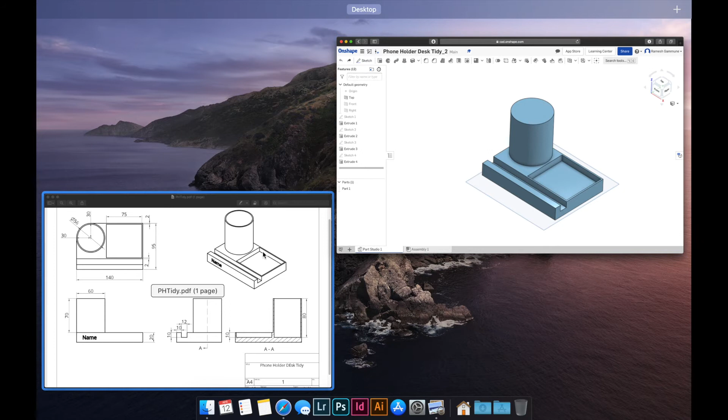I'm only going to do that one function today, but I am going to show you three different ways of doing it, and hopefully by doing it in three separate ways you'll understand how sketch relations work with the objects around it. Let's have a look at our drawing first. This is a 56mm diameter inner circle. The outside is a 60mm diameter circle, which gives us a wall thickness of 2mm.

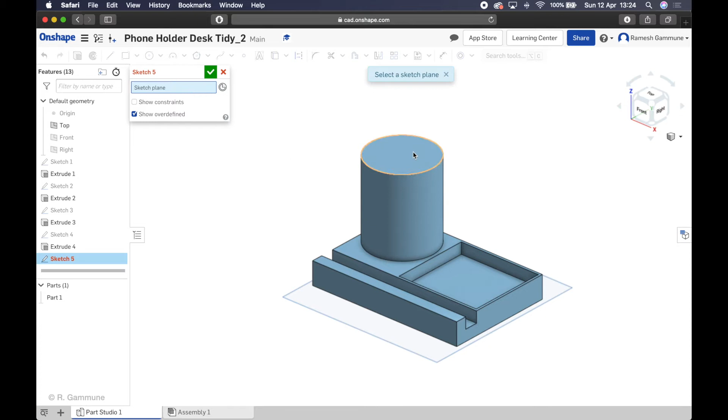Alright, let's go ahead and get on with it. First of all, we're going to sketch that inner circle and cut it down. As we are used to doing now, we're going to open a sketch and we will be sketching on this top surface. Double check it, make sure it's the correct one. Just to prove a point that we can only sketch on flat surfaces, it won't let me click the cylinder, because it's not a flat surface.

So sketch plane, that surface, right click, view normal to sketch plane. Let's go through the different ways of doing it. First one's going to be the easiest. We essentially want a second circle inside here, offset by 2mm, or with a diameter of 56mm. It's the same thing. I'm going to go ahead and pick the center point circle. And if we come towards the center of that, you'll see that little box, the lock-in box rather.

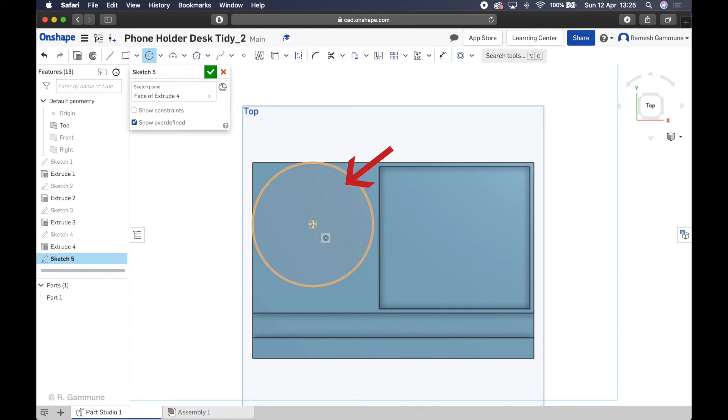There's another icon under that with two circles, which tells you that what we are going to draw will share the same center point of that circle. So we're going to go ahead and draw another circle, escape, dimension it, and give it our 56mm length. That's one way to do it.

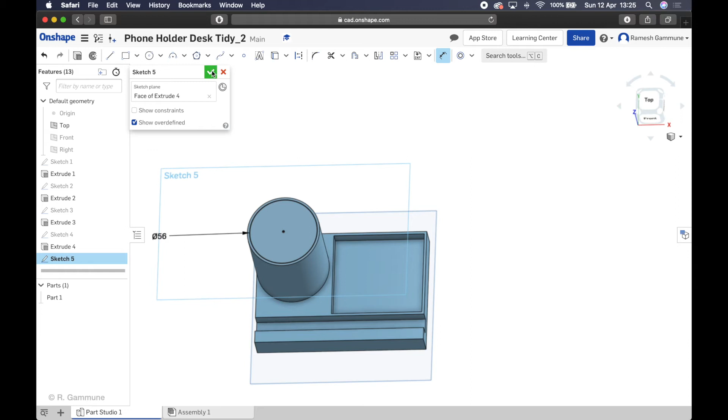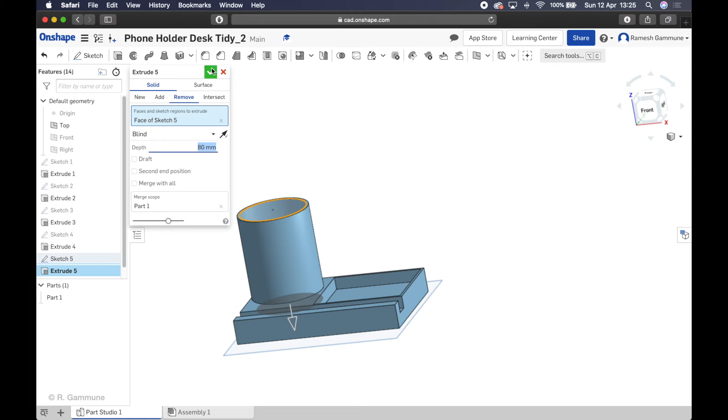We're going to go ahead and accept the sketch, and we're going to cut that down. Extrude, remove, pick that inner circle, look at the drawing again. It's going to go down to 80mm from the top, changing that to 80, and accept it. There we go, done.

Right, let's take it the second way now. This is also a good time to look at how the feature tree has been populated. You've got sketch 1, extrude 1, and if you just go over it, it'll highlight on your actual model what they are. So we are going to delete extrude 5 and sketch 5, just click them and hit delete on your keyboard.

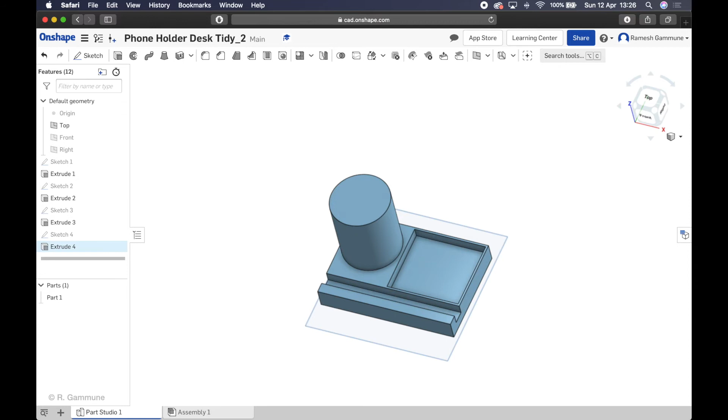So the second way to do it now, same deal, sketch, top surface, right click, view normal to sketch plane. I'm going to go ahead and draw a circle anywhere within that. Hit escape to get out of it. And what we are going to do is place this circle in the middle by defining a relationship between this circle and that circle.

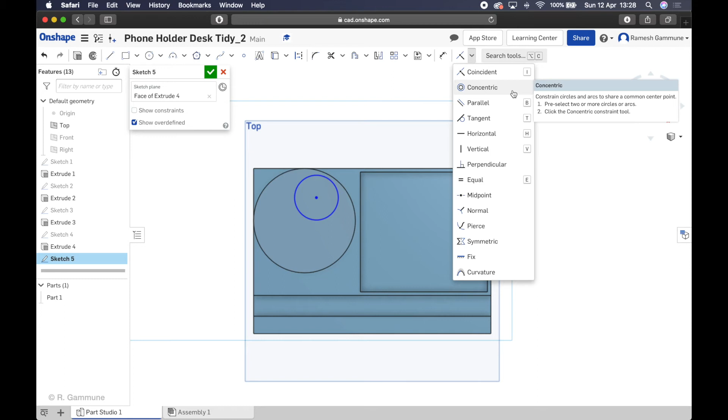So essentially what we're going to do is use your relationships icon here, you might have this fully visible, mine isn't because I've dropped my resolution for this. Just click on the down arrow, click on concentric. Concentric means the two circles share the same center. Click that and click this and the bigger circle, and you'll see that goes to the middle. Hit escape to get out of it. The center point is now black, which means it's not going to move.

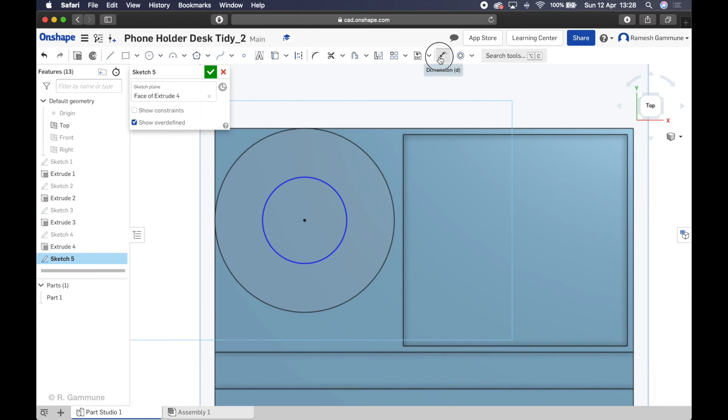But the actual circumference isn't yet, so we still need to define that by dimensioning it to 56mm. Enter. Then we can go ahead and do the extruded cut or the remove as per usual. 80 down. There we go. Accept that. It's done again.

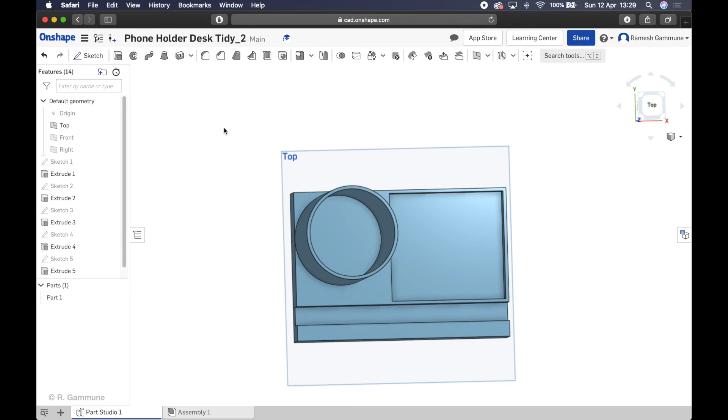Okay, let's go ahead and delete those two one more time to look at the last way of doing it. Same deal again, we have to start with the sketch, that doesn't change. Sketch plane, right click, view normal to sketch plane. Here we're going to use a function called offset.

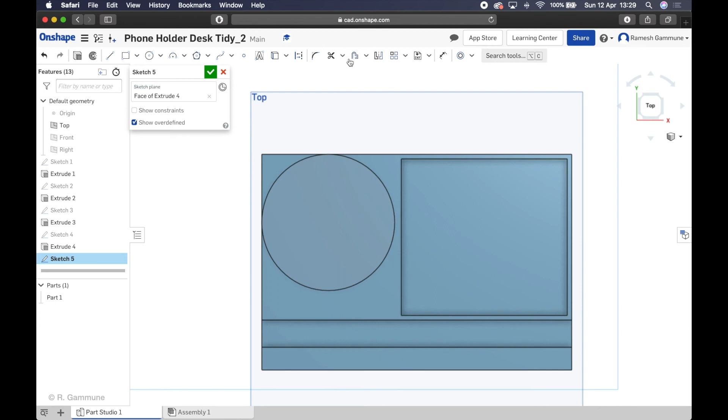Essentially what we're doing is we're taking this circle and we are going to draw another one on the inside that's 2 millimeters offset from it, which gives us a diameter of 56. So what we're going to do, see this little button over here, that's the offset tool. You click that, and if you click on the circumference of this, it'll draw this sketch out for you. But we don't want it on the outside, we want it on the inside. So grab this arrow and just pull it in wherever, hit enter.

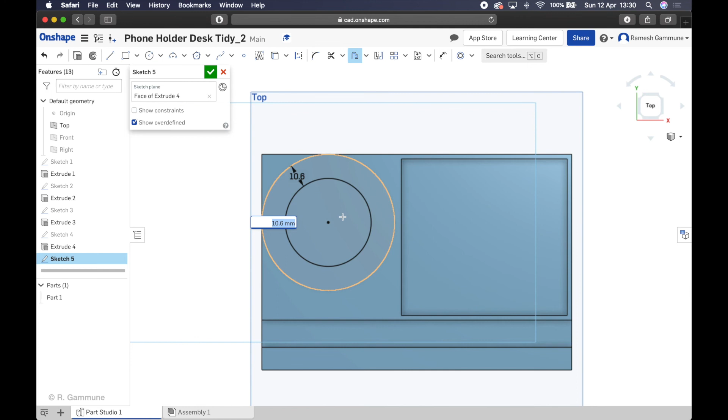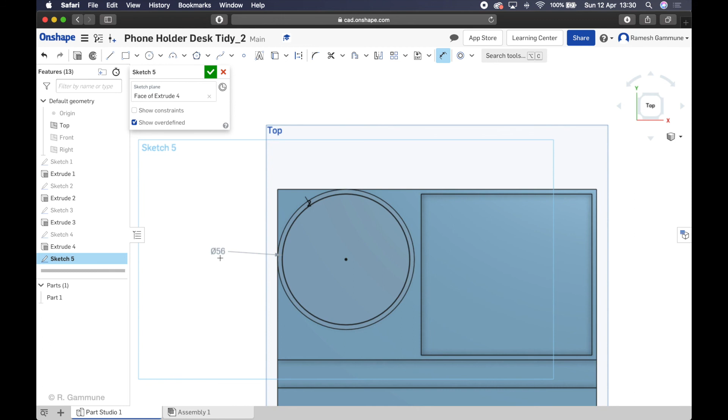You can change the measurement here, or you can double click, so just hit the dimension button, double click, and set that to 2 mil. Which then again, if you wanted to cross check it, gives us a diameter of 56 because it's offset by 2. Same thing, accept the sketch, extrude, remove that one, down to 80. Enter, accept it. There we go, guys.

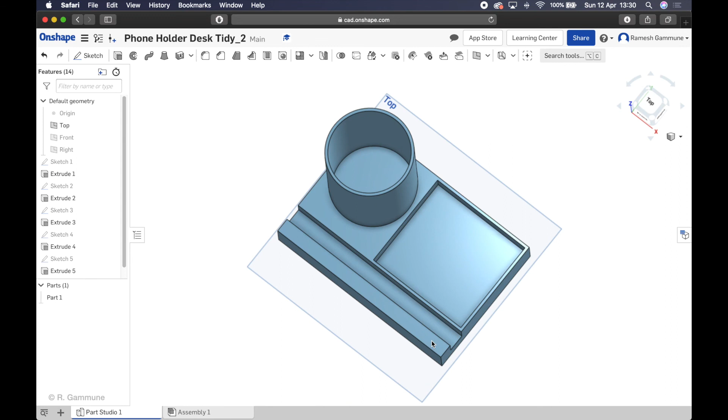It's a shorter video this week, but I do want you to practice those 3 methods. Just keep going over this video and those steps as much as you can, and just kind of get used to it. You'll figure out which way works for you. That's not essentially only for circles. You can offset anything, any edge onto a sketch.